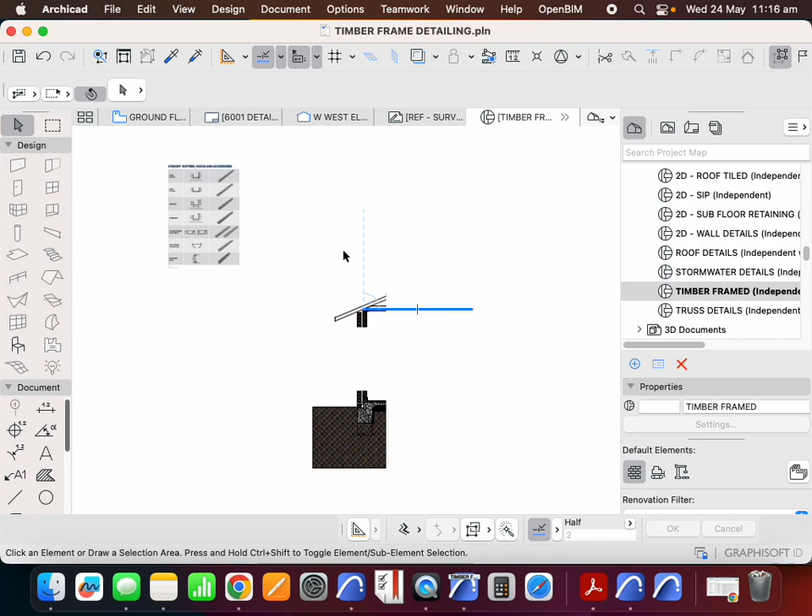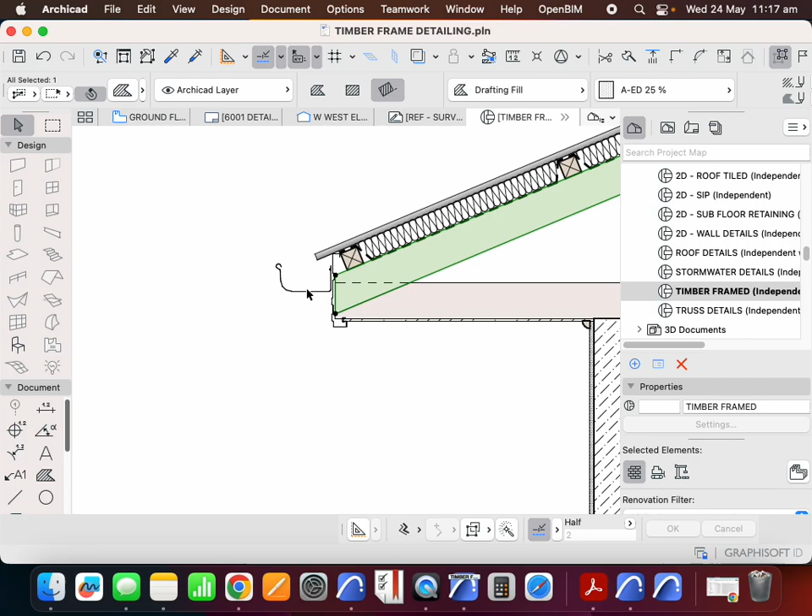We're now going to look at another framing detail, or in this case, a roof rainwater gutter detail. But we're going to have a look at a half round gutter with a different type of rafter and a different type of soffit. So this had a flat soffit, a 90mm rafter, a quad gutter, and a Novaline fascia. What if we wanted to have exposed rafter ends?

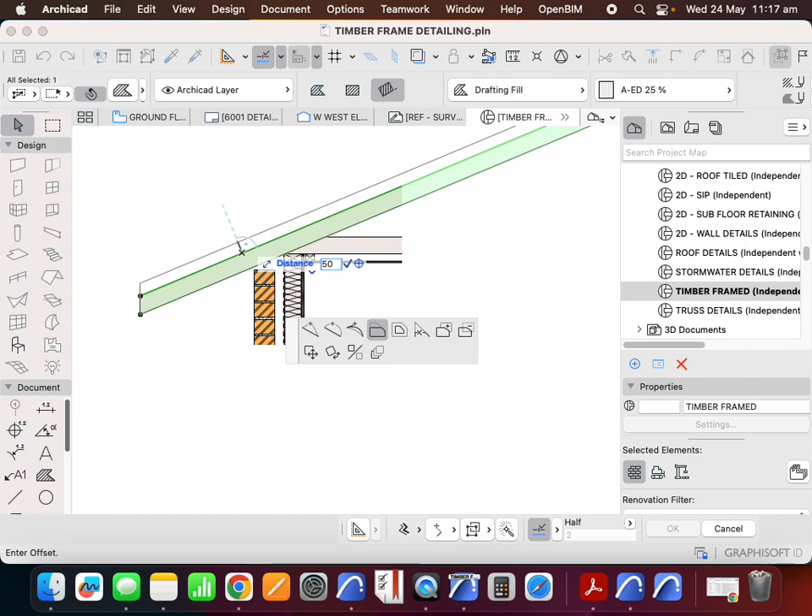Now, if we were to do this, it would normally follow a few other patterns. So normally, instead of being a 90mm rafter, it would probably be a larger piece of timber. Not always, but possibly. So let's just assume this is going to be a 140mm piece of timber. So we're going to increase this by 50mm. Now, if this is a larger rafter, which probably also means that it's a traditionally cut framed roof instead of a truss framed roof, it's probably also going to need to be notched.

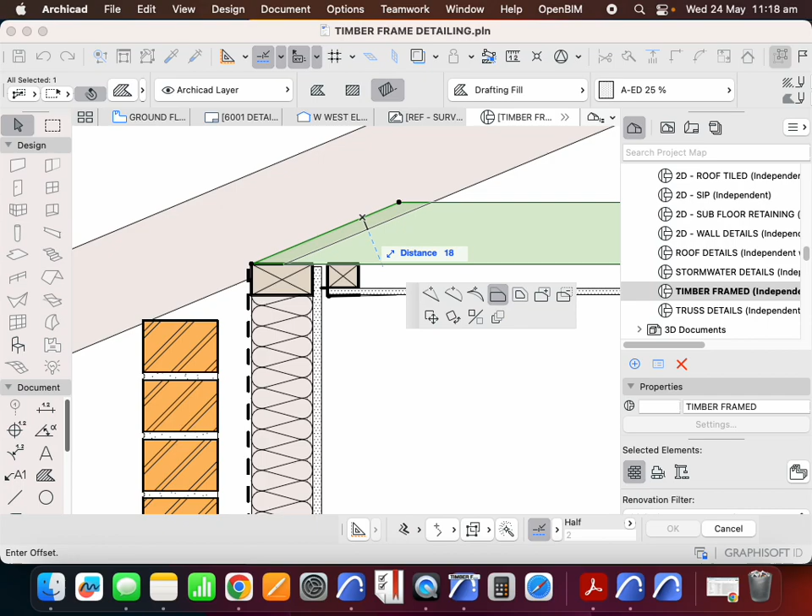So let's bring this down 18mm and we'll notch out this corner. So we'll just move those points and we'll bring this one back. And in this case, instead of the rafter and the ceiling joist being cut together, the ceiling joist in this case is going to go past and sit on the top plate like this. So we're seeing the rafter in the foreground and we're seeing the ceiling joist in the background.

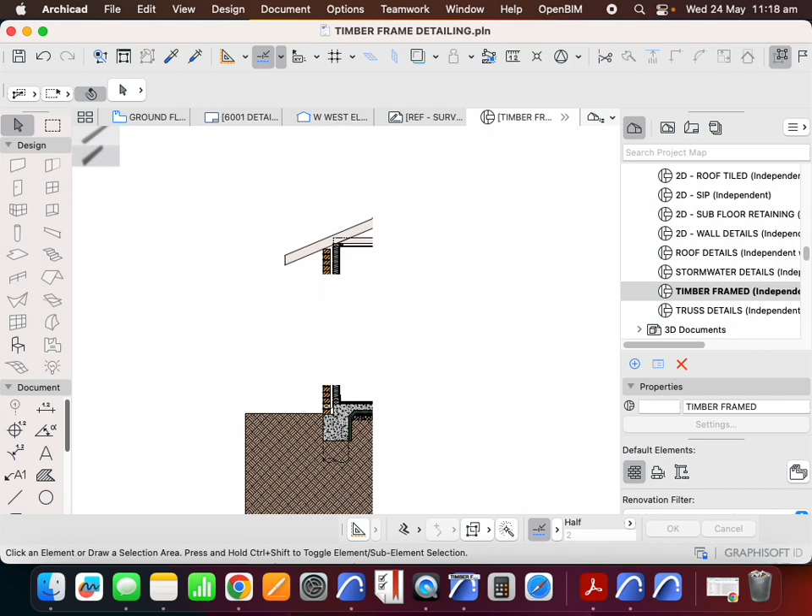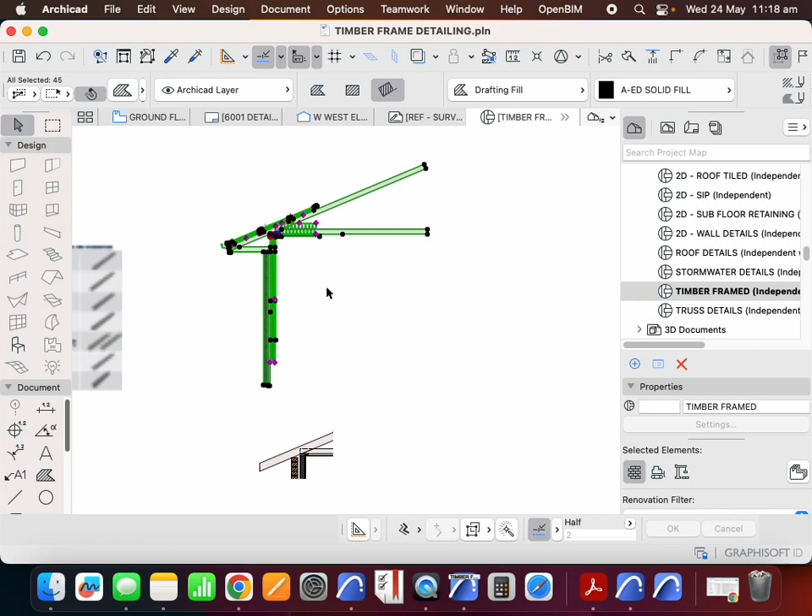We'll leave this for now as a brick veneer, but of course this could also apply if it was a cavity brick or a timber frame and clad detail also. And we'll copy the rest of this roof just to make this really simple. I got too much, I'm aware of that. I'm just going to move it up here. I'll delete everything that I don't want.

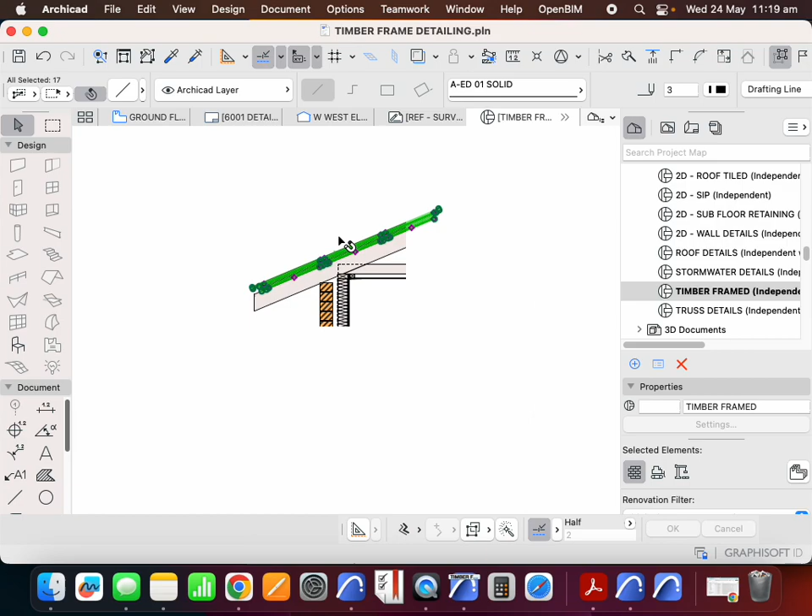What I'm wanting to keep here is the roof sheeting and the battens and the insulation. So I'll move this down into position and I'll move it based on the batten, and for now I'm just going to paste the batten there and we're going to move it a little bit more later. I'll just group all that together and we're going to slide that down as necessary.

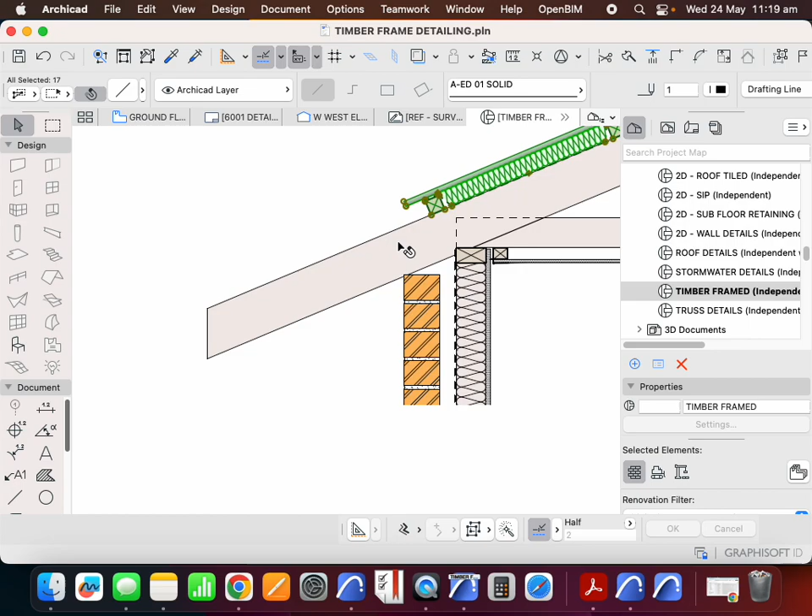Now, in order to have exposed rafters, that means that we're not going to have a lining on the underside of the rafter. That will also typically mean that I can't get away with just using battens because I don't want to see these battens and I don't want to see this insulation. So instead of having a batten here, typically I'm going to have some type of lining. So if I move this away considerably for now, we'll move this all the way up here. Let's put timber lining boards here instead. So I can use this same timber for now.

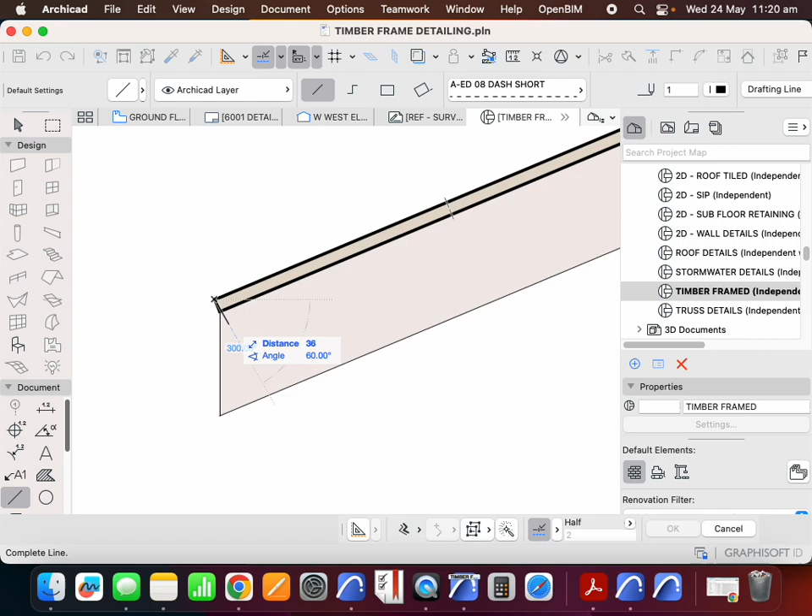And we might assume that the timber lining boards are 19mm. Now this could be tongue and groove, or this could be V-groove or something like that. It doesn't really matter. Now we will see that. So if we assume, for instance, that's a 200mm, I could draw a line here. Let's do it this way. Make it a bit thicker. And I'll multiply this with a spread of 200 or 190.

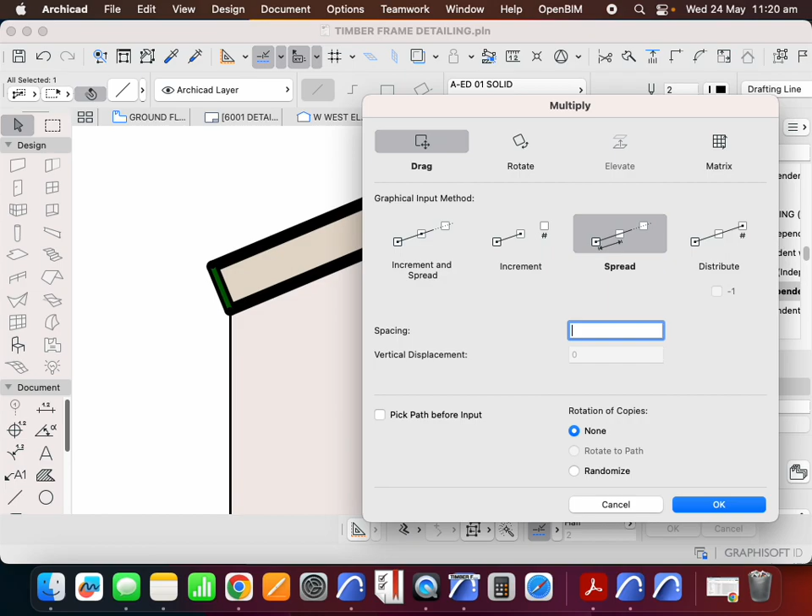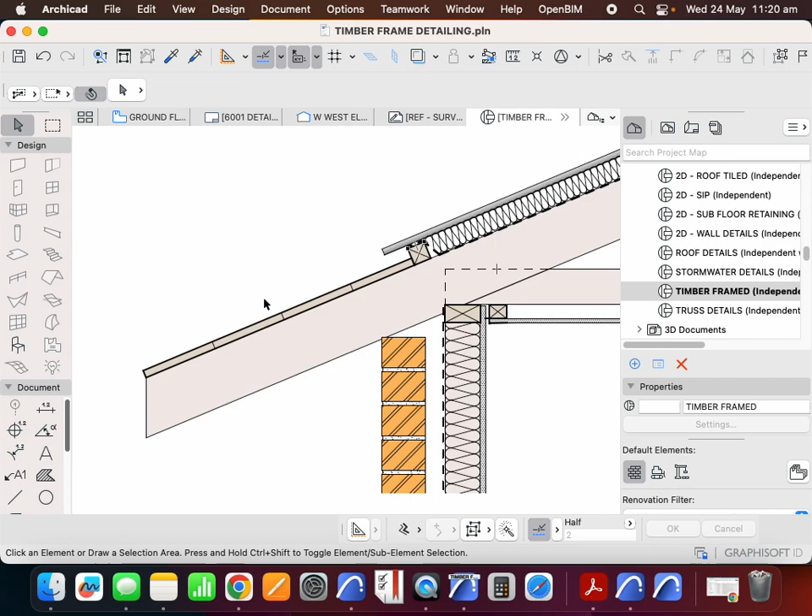So just dividing this into separate panels. Again, it could be V-groove, it could be tongue and groove. It's probably not just straight cut, but I don't need to see it at that level of detail. That's fine. Now I do want, ideally, something to continue along here. So I need something to continue. What is that something going to be? Am I going to have a batten that goes over the top of it? Obviously this is thinner than the batten zone, and we're going to need a smaller batten.

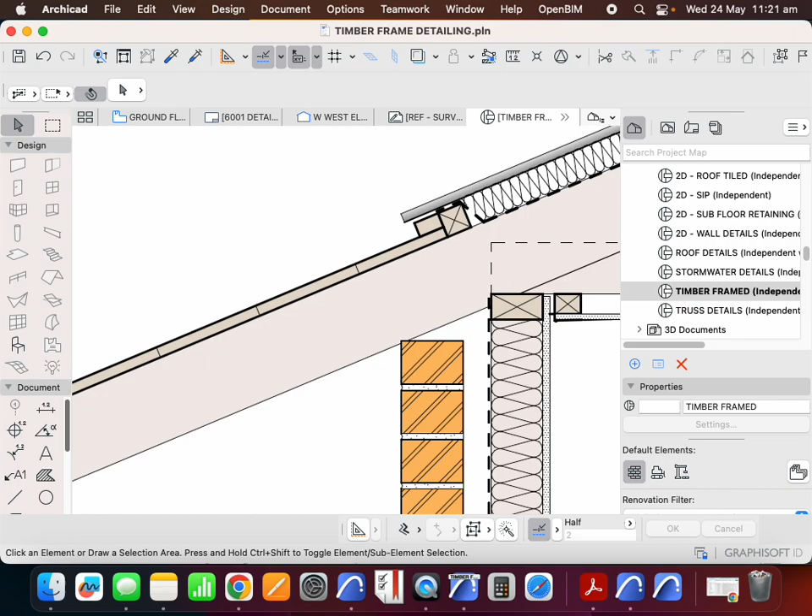So let's just create what that would look like. 25mm. In this case, I'll make it 45. It could, of course, be bigger as well. So I want this to sit here. And I can group these together, group, and maybe I'll just need a couple of these. Move, drag a copy, and we'll do at least, say, 300 center.

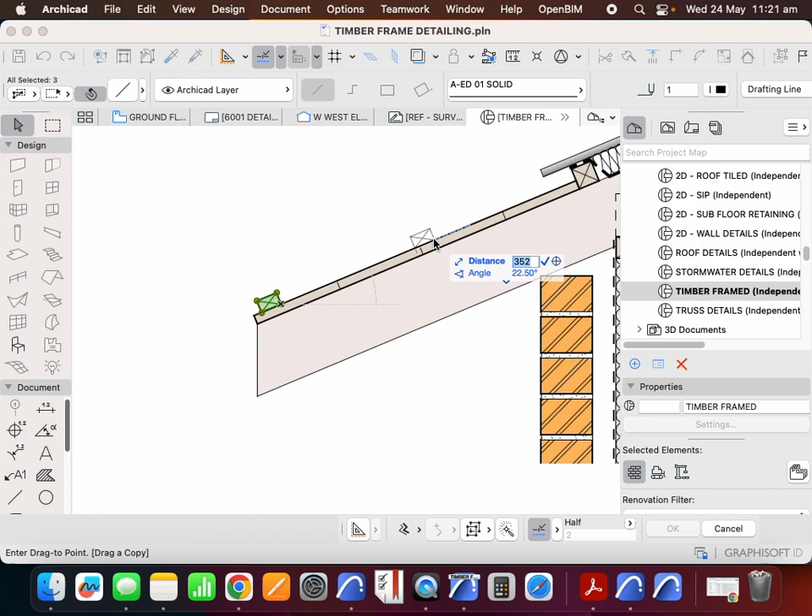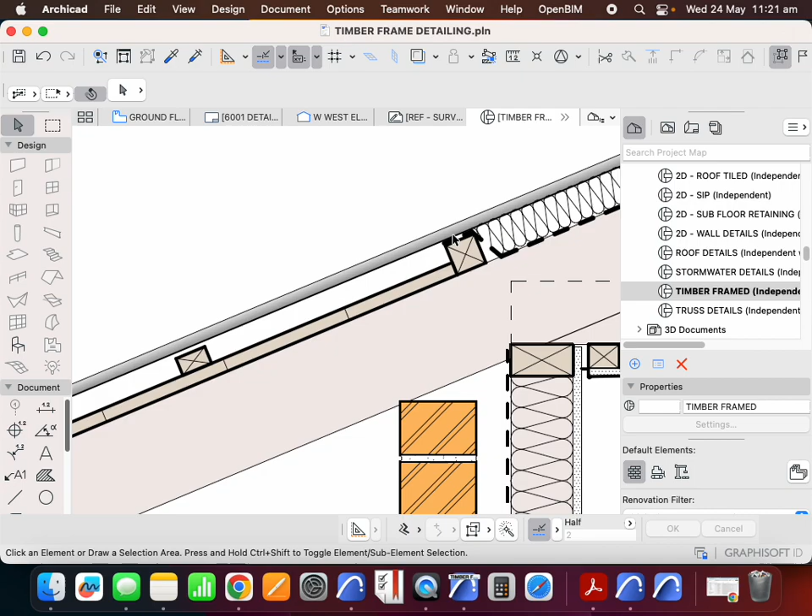Now the idea is that the roof sheet is going to continue, sorry, I'm pressing the wrong button. The roof sheet's going to continue across this, and the sarking blanket may continue through, or it may just be sarking, so we could actually have a difference going from a blanket to a sheet.

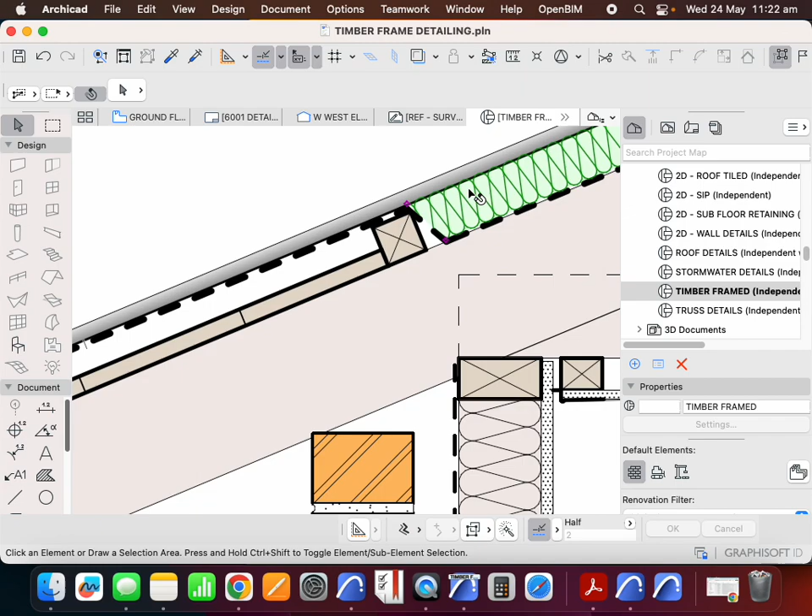Of course, the point here is that this is outside, so I don't technically need a blanket when it's outside, although I could still have a blanket if I want to. The blanket's going to help to reduce the sound, but I would also just need to make sure that the thickness of that blanket's not going to create a problem for how this would work. So for now, we'll just leave this represented like this to keep it nice and simple.

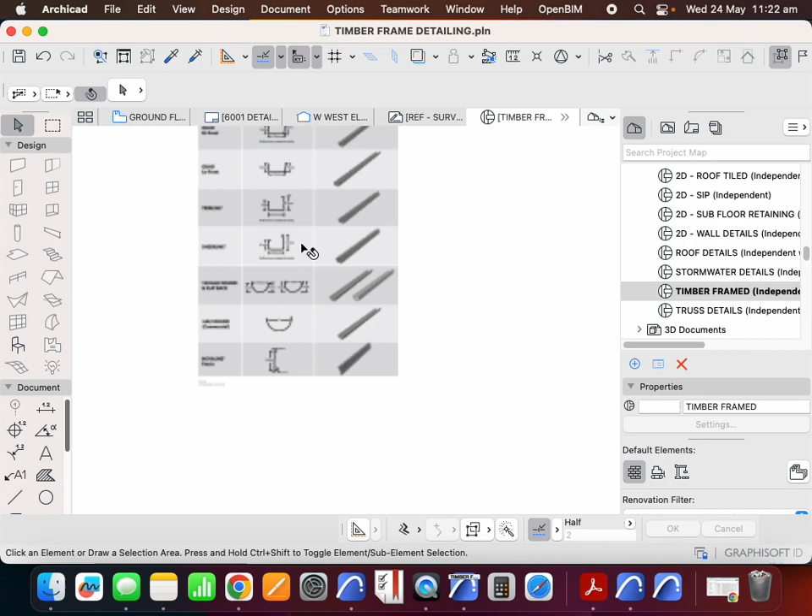The next thing I need to consider is what type of gutter am I going to use? And in this case, I want to use a half round gutter. So I'll take this, another version of this PDF, I'll explode it, and I just want to keep this one here. So instead of deleting everything else, I'll just move this one away this time. And then delete that all in one go.

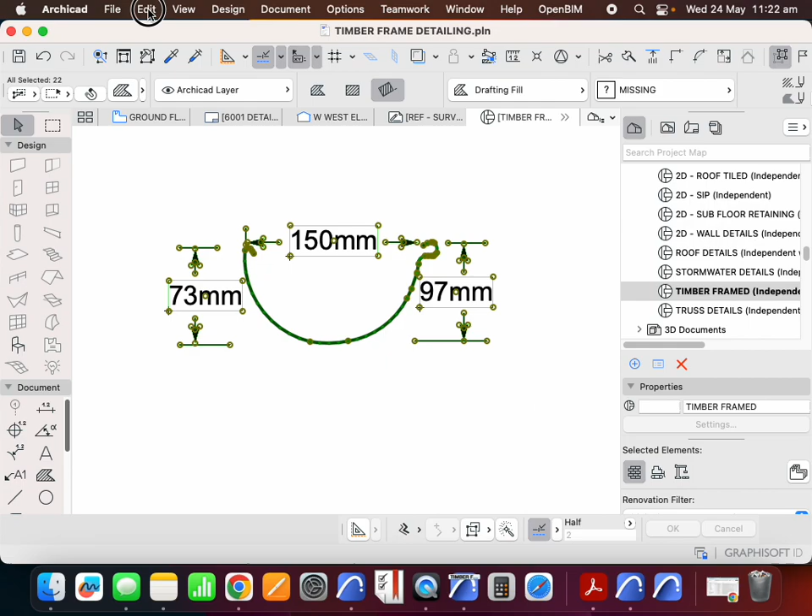I'll do what I did last time and check the scale. In this case, I'll use the 97mm, edit, reshape, resize, define graphically, 97. I'll delete all the rest of these.

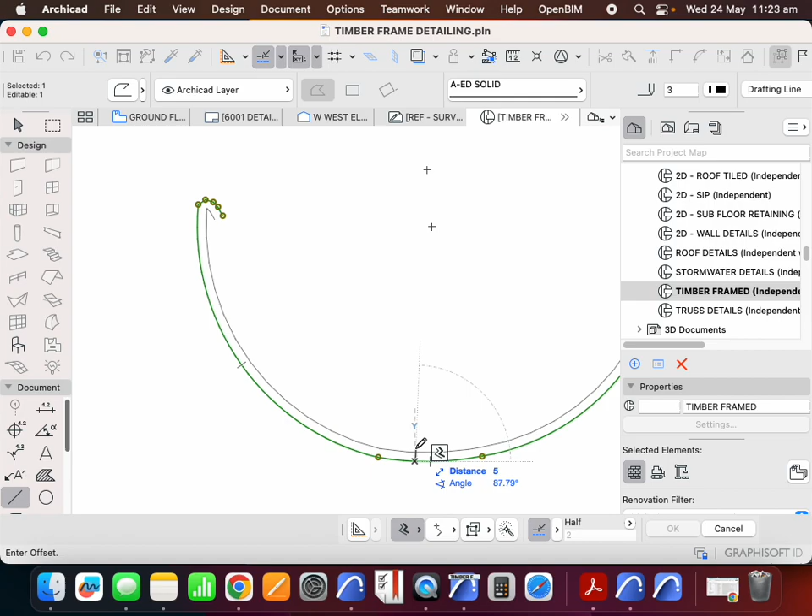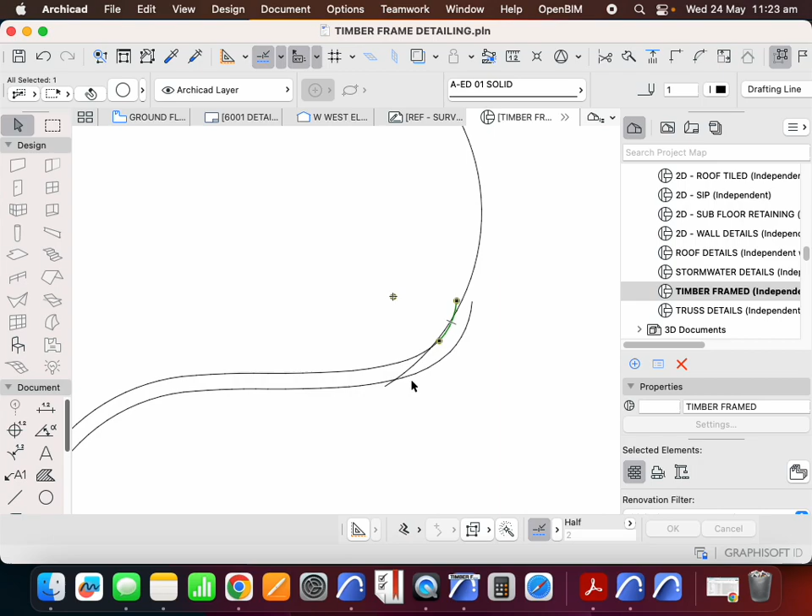Select, offset inside, and I want that to be less than 1 millimeter. Close it. You see that didn't offset very well. That's because it wasn't probably drawn very well from what we can see. So if I was to try to fix this,

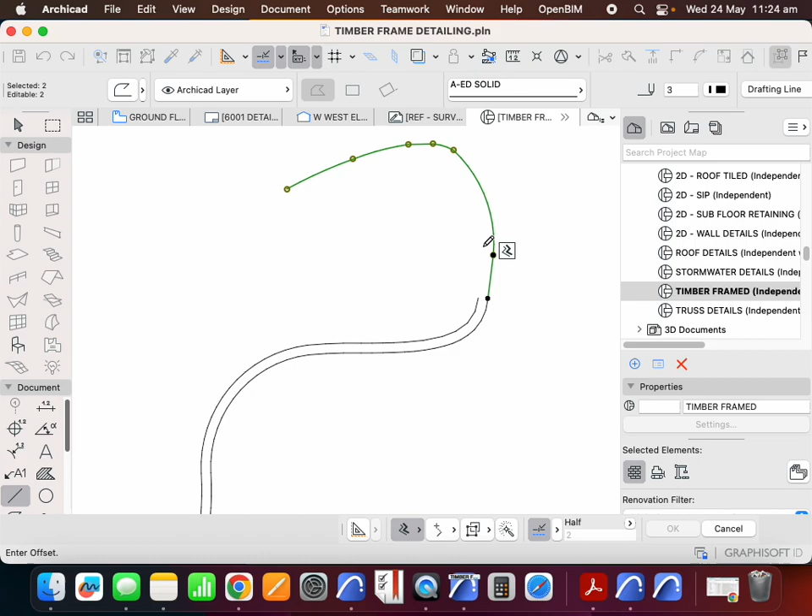let's just offset this part. It's going to be really tricky because I now need to line that up. Something else is also going a little bit wrong here, but that's okay. I have to make these join, otherwise that's not going to close. And I need to close this end. Now hopefully that's going to work.

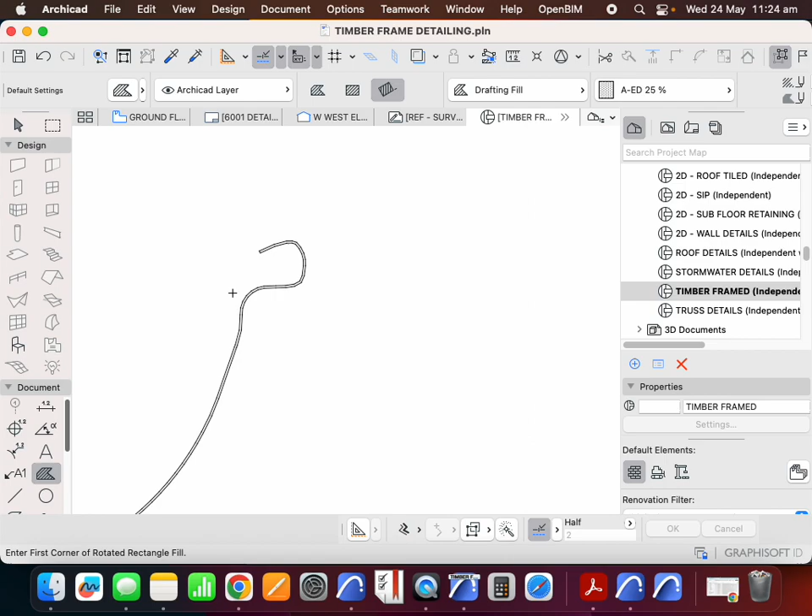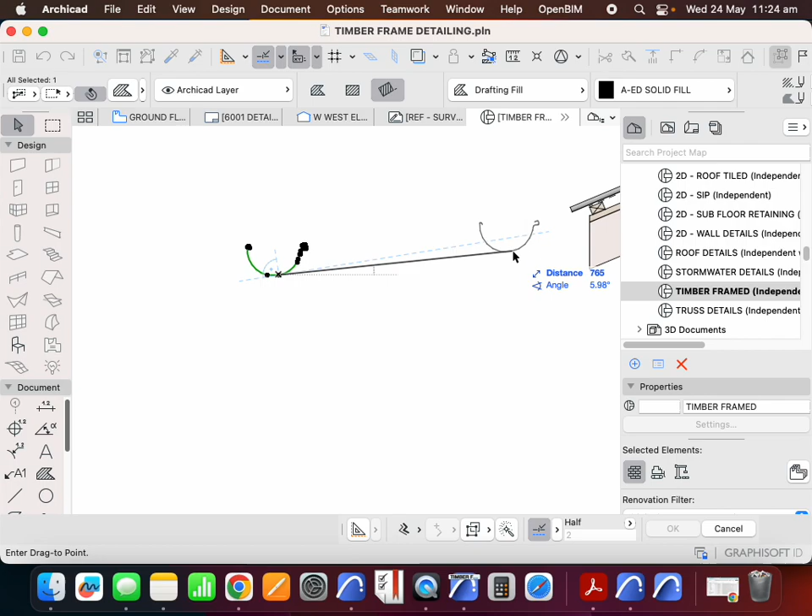There were a few errors in this case, so it might not work like I wanted to in the first go. We'll pick up the setting of this fill again. There we go, it worked all right. Turn the magnet back on to make it really easy to grab that fill. Move the half round gutter, delete the lines. This is backwards again, so we'll mirror it, move mirror. So I want the roll on the outside.

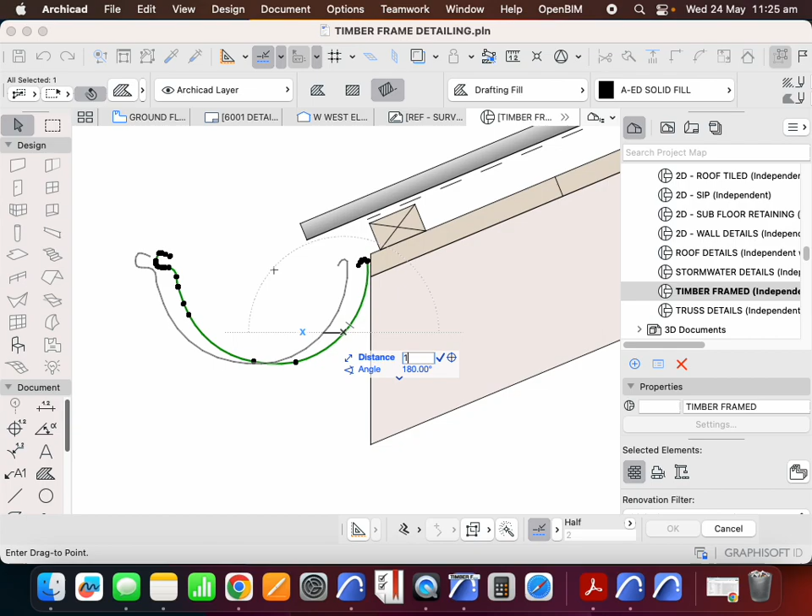Now where does this sit? That's the question, of course. So this again needs to sit below the roof line. In this case, I want to expose the ends, but it needs to come out a little bit because we can see that because it's half round, it's a little bit trickier to fix. It's not easy to fix it to a fascia. In this case, it's not even easy to fix it directly to a rafter.

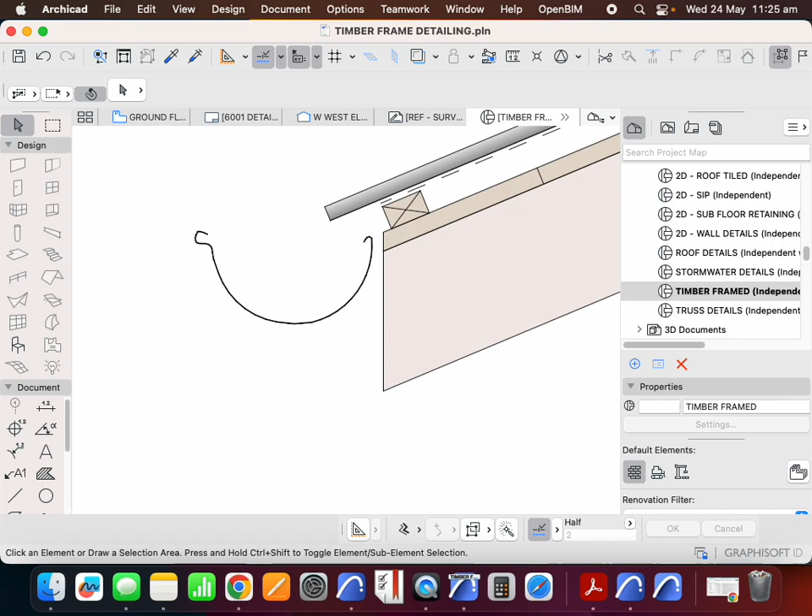And so I need to have a half round gutter bracket that this fixes to. Now I could use a strap fixing, but I prefer the look of the half round gutter bracket. Now I can represent that. I can try to draw it. So I could use the same method as before, offset. Now I'm sort of limited with what I can offset here. I'm going to offset as much as I can, and then I'll delete all the bits that I don't want.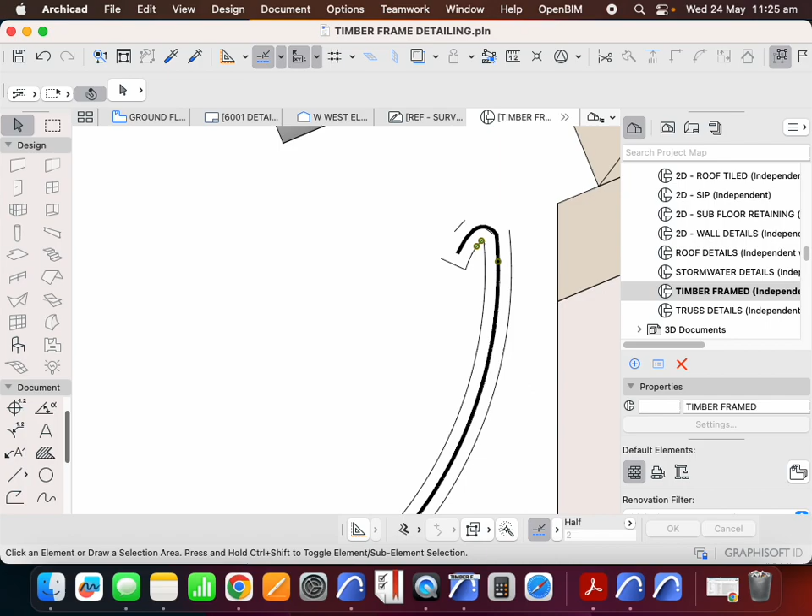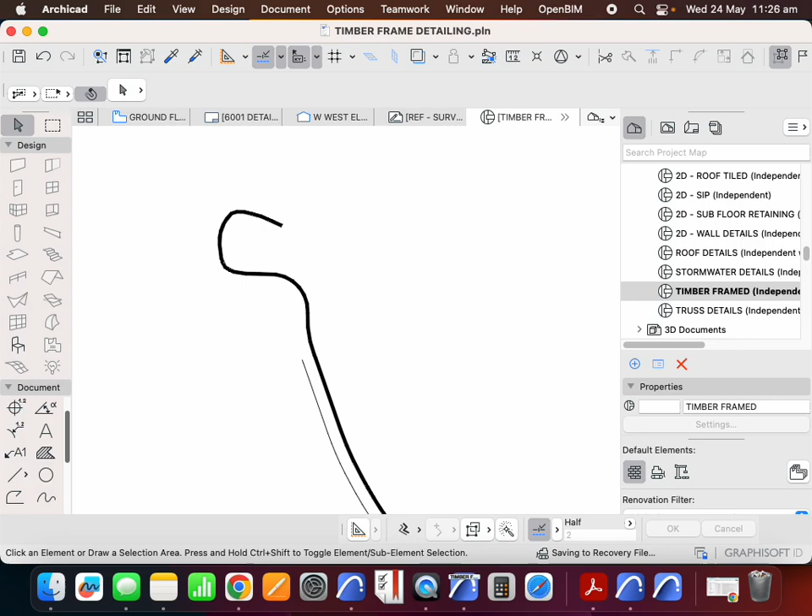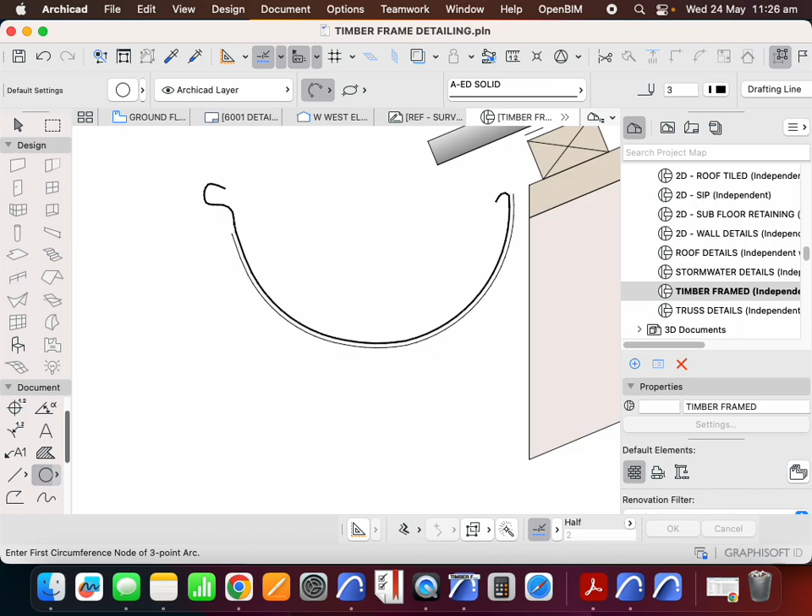Let's see if I can make that faster. Great. So then I'm left with these few arcs. So they all need to be grouped together, and then I can offset that again if I need to. Or I can just draw a new arc myself, or I can use a spline. So I'll just try to draw a real arc in this case. So I'm going to suggest that the bracket gets very thin on the edge.

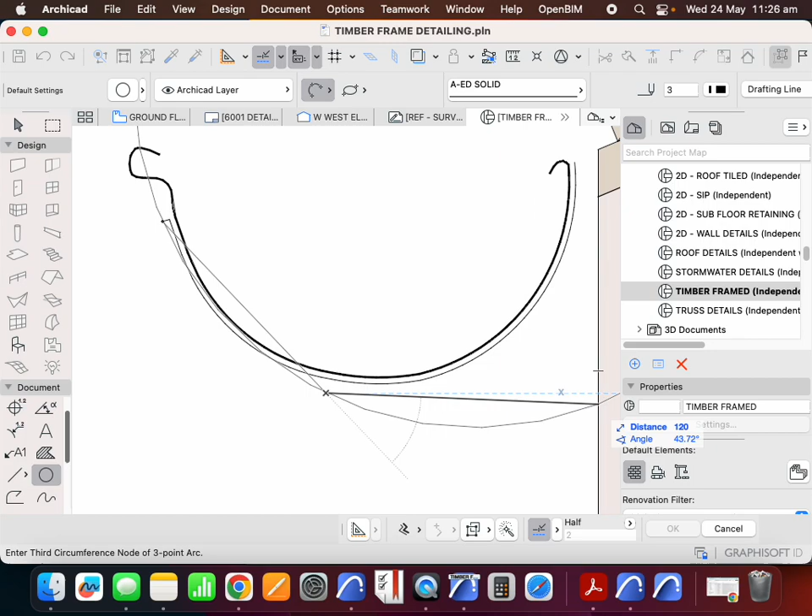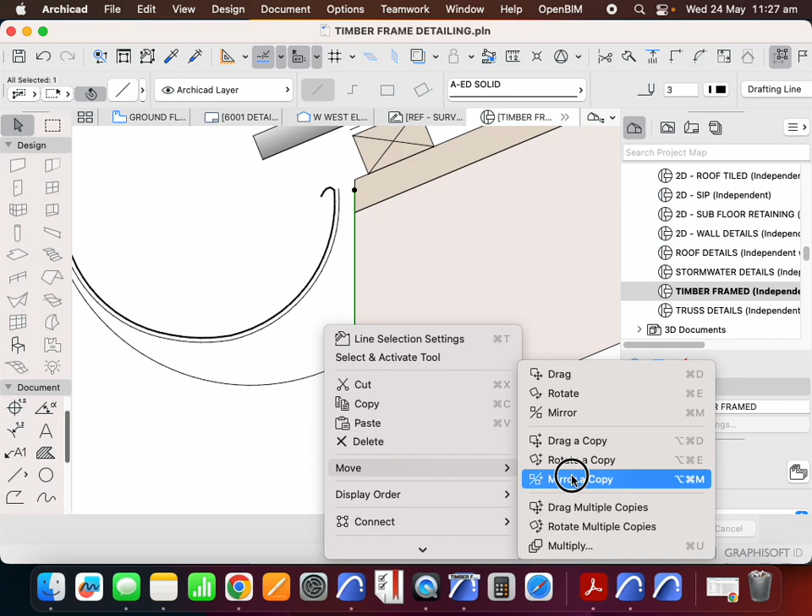Now this isn't a custom item, this is an off-the-shelf item, but unfortunately I just couldn't find any nice details for it, so I'm just going to draw it quickly. So I'm going to do this as a 3-point curve. I haven't got it right in the first go, but we'll see that it will work in the end. So I'm going to need to stretch that curve out a little bit. And then I just want it to have a bit more depth at the back. Now I think it's only 5 mil, not 10.

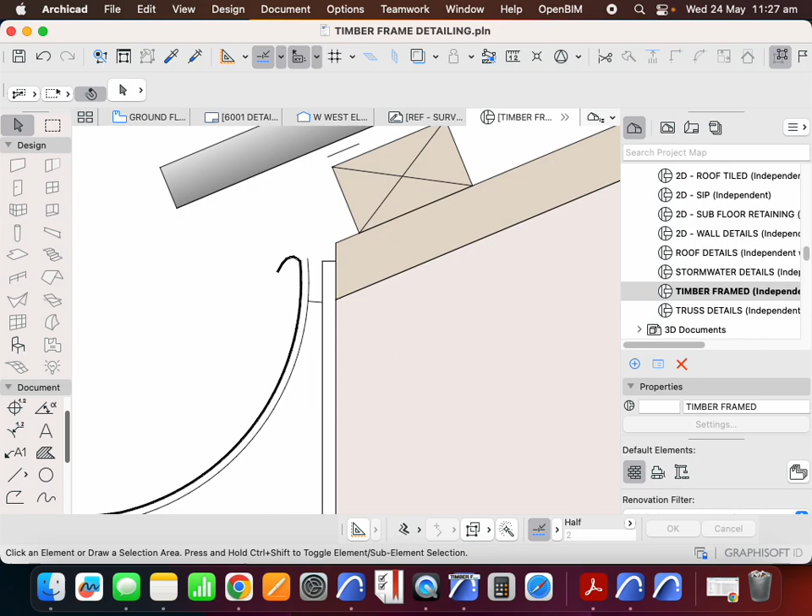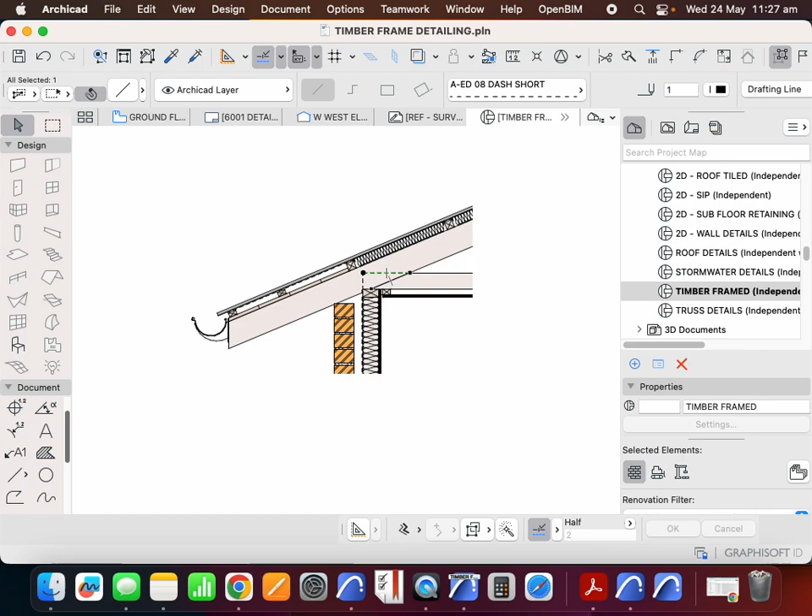All right, so that's just a representation of my half round gutter bracket sitting on the outside. So now I've got my roof sheeting, I've got my half round gutter bracket. We've extended the rafter depth. We've changed the ceiling joist so that it's running past the rafter. Now, how does this finish?

Now, this could be brick veneer or it could be weatherboard cladding, like I said. Now, typically, I wouldn't be doing this type of detail for a brick veneer anyway. It's more likely to be a weatherboard clad detail. So I'm going to delete the brick from here, and we're going to use this as an opportunity to have a look at replacing this with a James Hardie weatherboard cladding or a WeatherTex. Now, if I wanted it to be real timber, I'd use WeatherTex. If I wanted it to be fiber cement, I might use something like James Hardie.

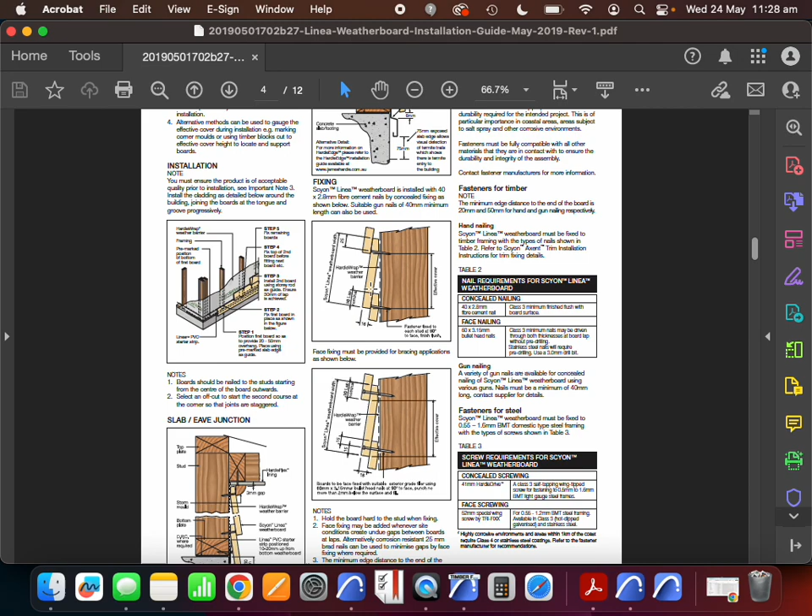James Hardie has a Linea. Let's do it this way. So I might open it up first. So this is the look that I'm going for in this particular circumstance. And we can see some detailing here to explain how it's actually fixing. This is what I want to copy effectively. So I'm going to find one that looks pretty good in terms of a detail. So this is page 4. This is the one that we're going to import.

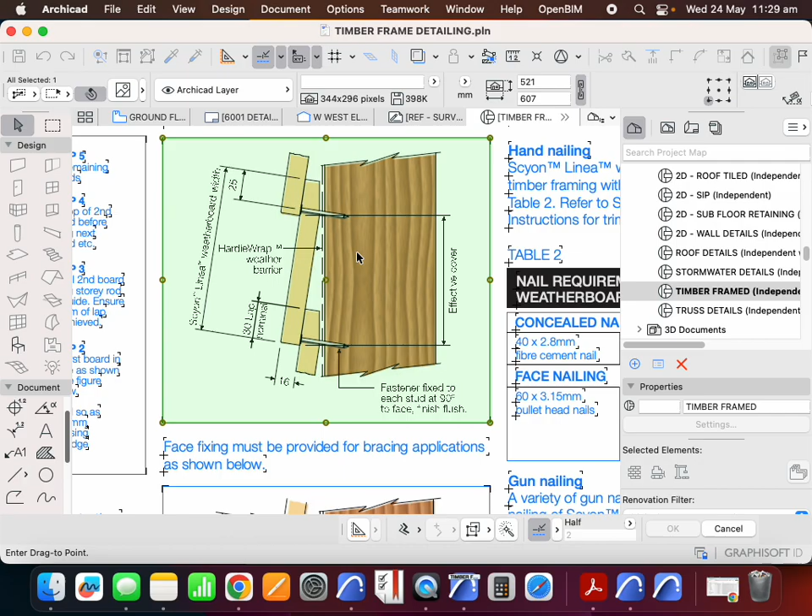Now these details aren't quite the same as the Lysaght one. So when I try to explode this, we see it's only going to give me an image. So there's an image there, and then there's bits as well. So in this case, all that I'm wanting to keep is this element, and I just need to make sure it's the right size.

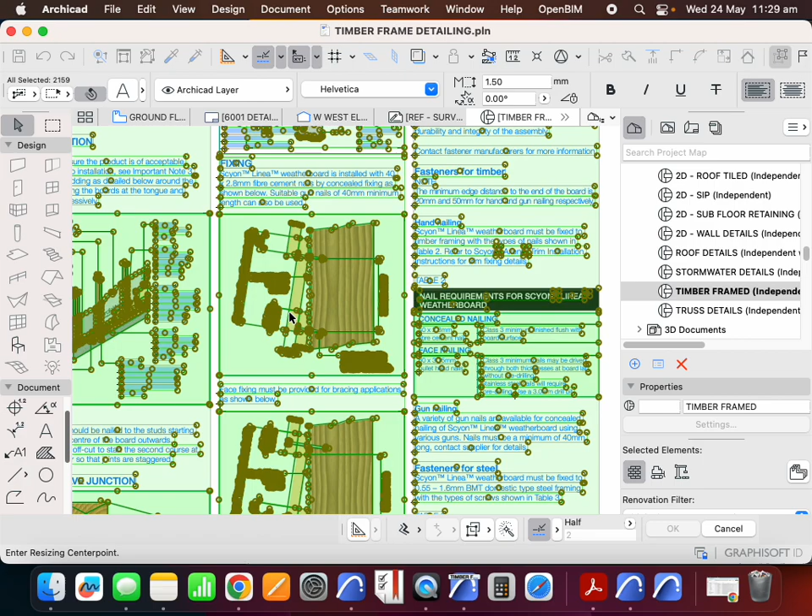So as before, I'll do it all in this case. It's a bit of a mess, but that's fine. Resize, define graphically, and make sure it's got that 30 mil lap from here to here. I want that to be 30.

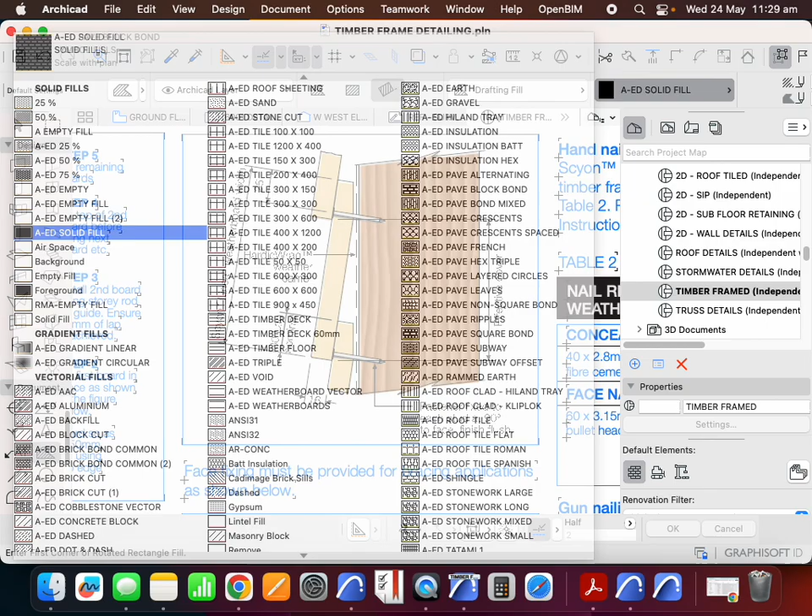Now, I don't want to have all this mess. Like before, I'm not going to keep that. I'm just going to use this to trace over a fill. What is it? So it's fiber cement, so it will look like this, just like the fiber cement soffit lining that I had. But I'll just trace over this one. Now I can do this in one go with a magic wand. And I might just copy over this one as well, just to help explain how that works.

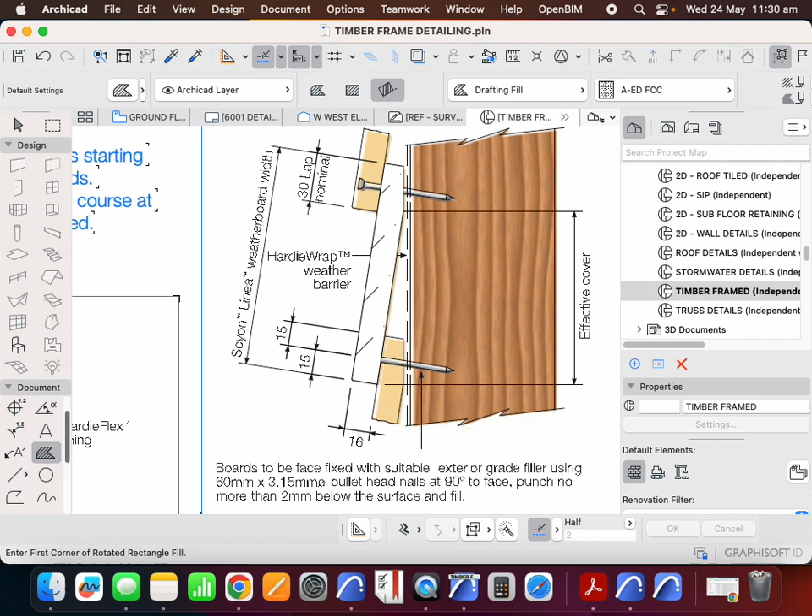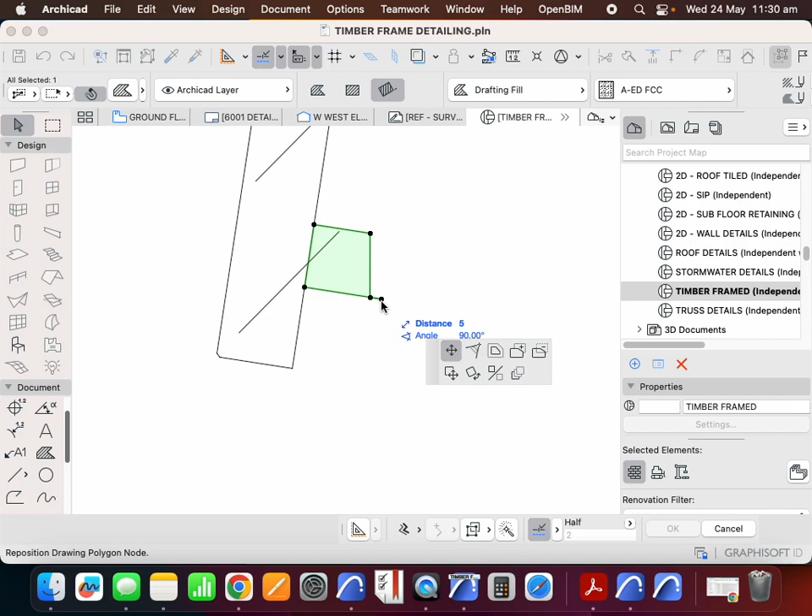So again, it's a 30 mil lap. I'll just copy that and copy this just to remind myself of where it needs to sit. I'll move this into place. Now, where do we start? When we're doing weatherboard, of course, the way that the overlap works is that we need to start at the bottom. So the reality is that this is actually starting all the way down here. At the moment, I don't really care about drawing or representing the whole wall. So we're just going to start from around about here.

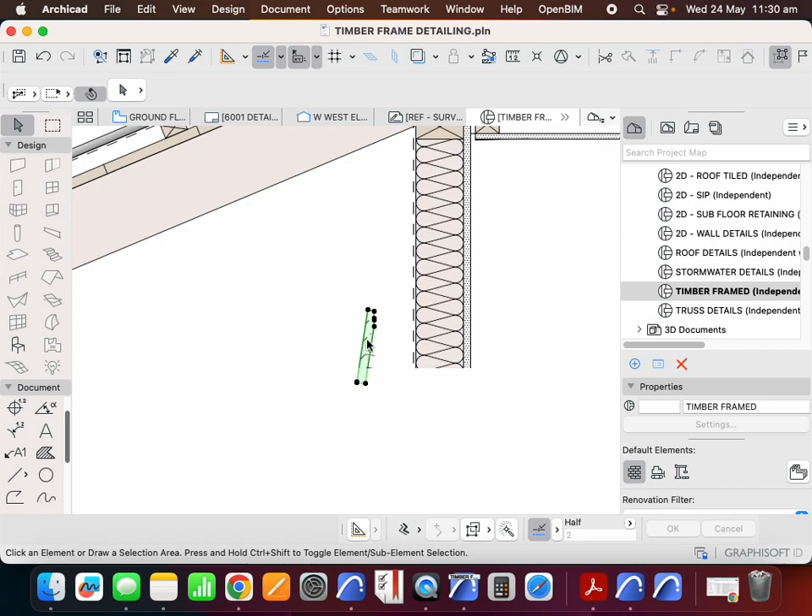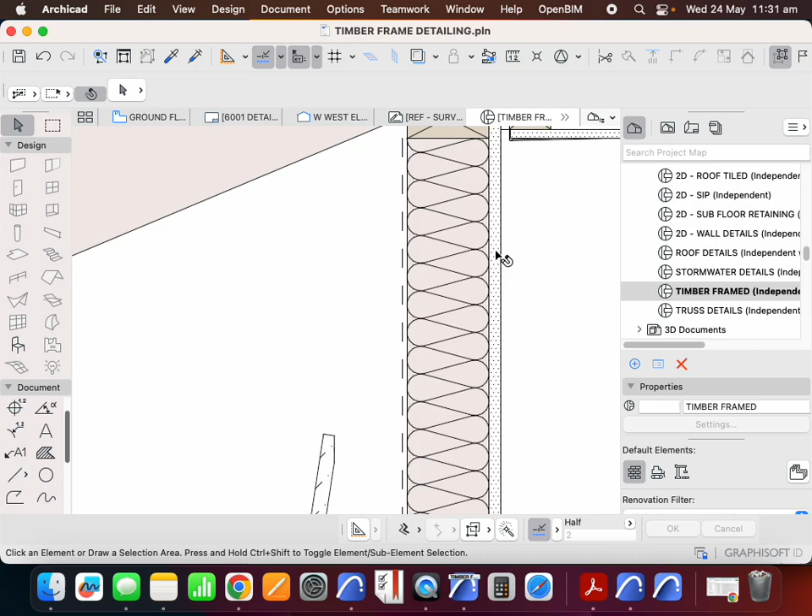Before I do this, however, when I'm using weatherboard, I'll tend not to have weatherboard stuck directly to the outside of the stud. I want to create better insulation, both thermally, and I want to create better sealing. The sealing on these weatherboards isn't very good. So what I'll typically do is use a piece of plywood or a board of plywood or orientated strand board on the outside of my stud.

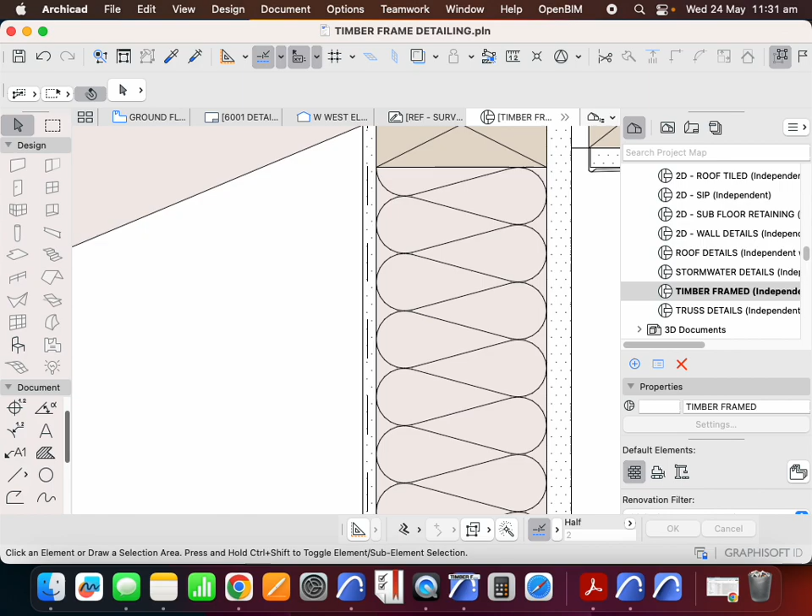So let's just do this by copying the plasterboard for now. And instead of being 13 mil, let's get rid of 6 of that. So it's going to be 7 mil plywood or 6 mil orientated strand board typically. And then I'm going to have my sarking or my vapor membrane on the outside of that plywood. Again, I need to toggle between my true line weight and my thin line weight so that I can see it.

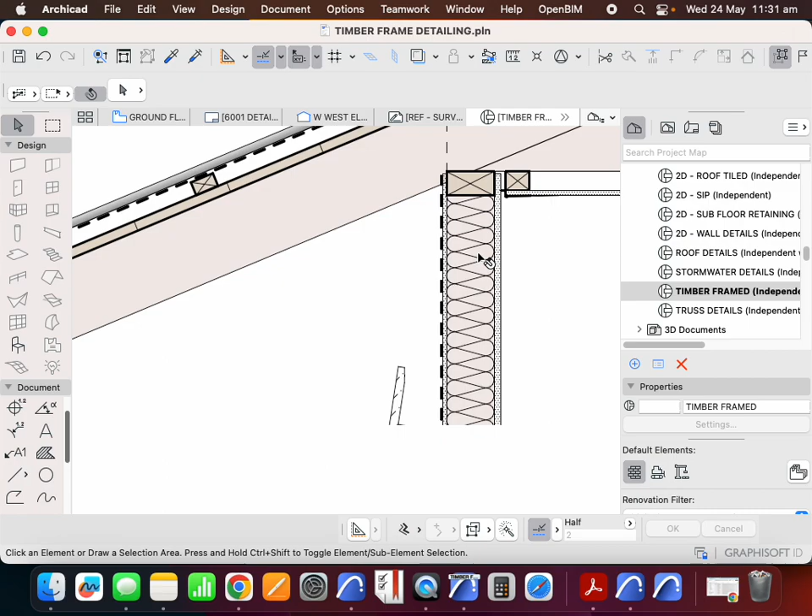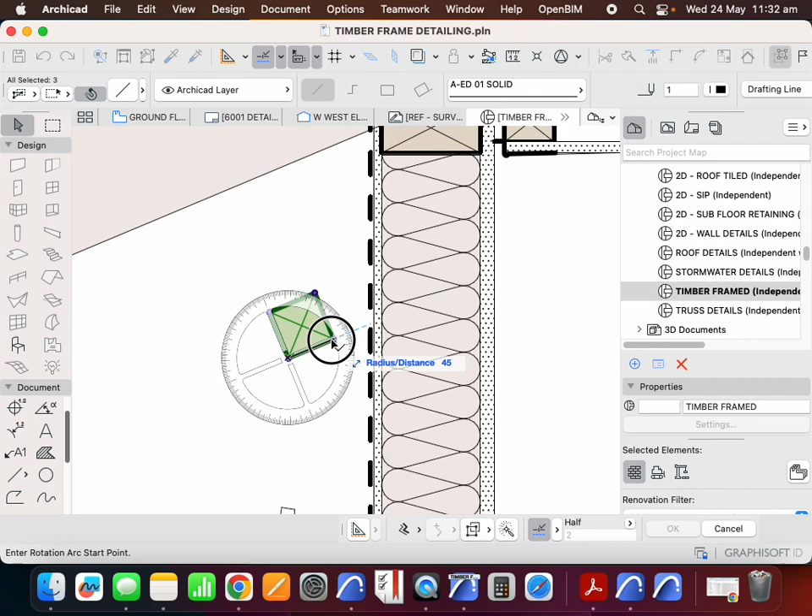And then on the outside of that, I'm probably going to put battens because again, I want to have a space, a cavity between my membrane and my weatherboard. So what will that look like? That's going to look like this. Rotate. Instead of being 45, that'll be 35. Sorry, stretch, edit, reshape, stretch.

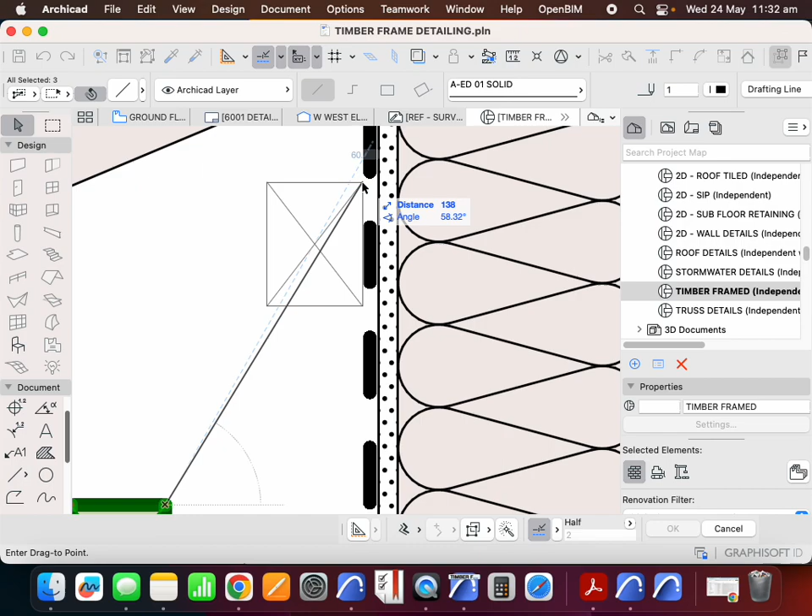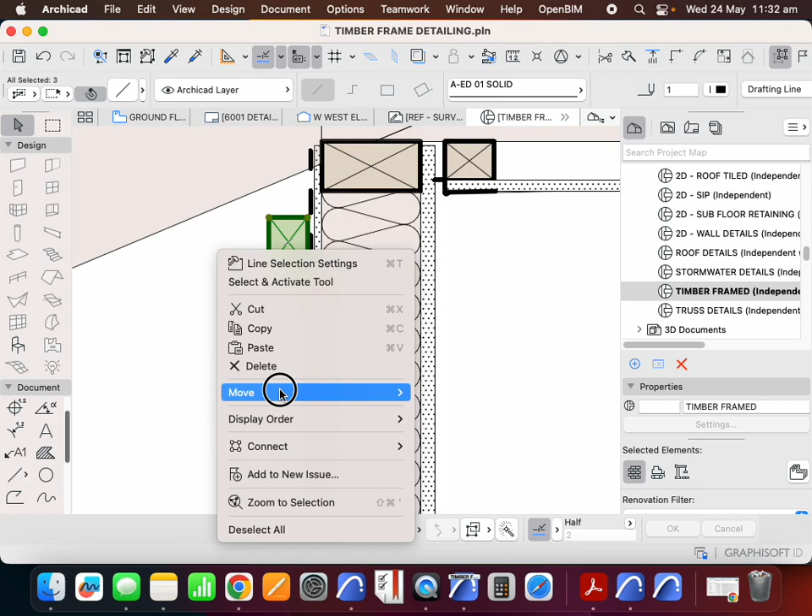Now, basically, that's going to sit here. But I don't want a horizontal batten, I actually need a vertical batten. So that'll be like that batten, but let's use the rotated rectangular method. Going down here. Now move this batten to the side for now. Now where does this go? This batten can extend up as far as I want. In this case, I'm going to have this extending all the way up because I want to clad over my rafter, or between my rafter might be a more correct way of saying that.

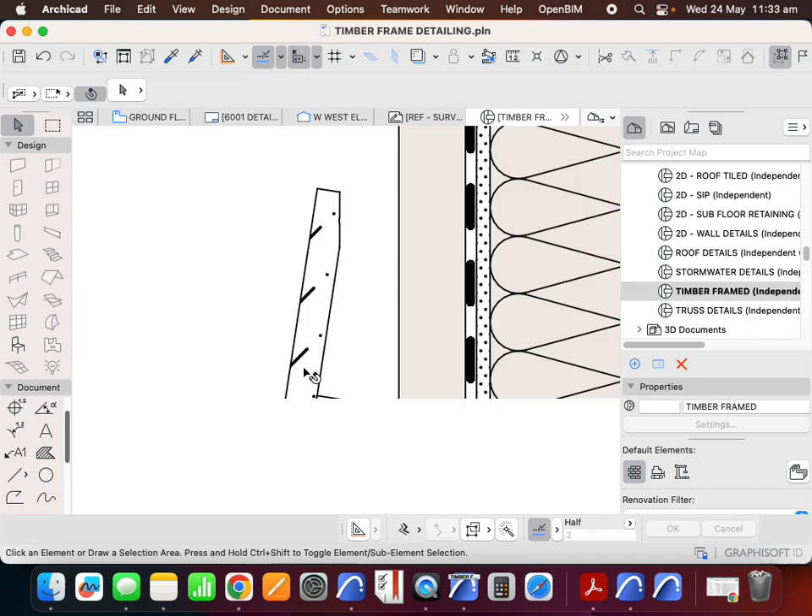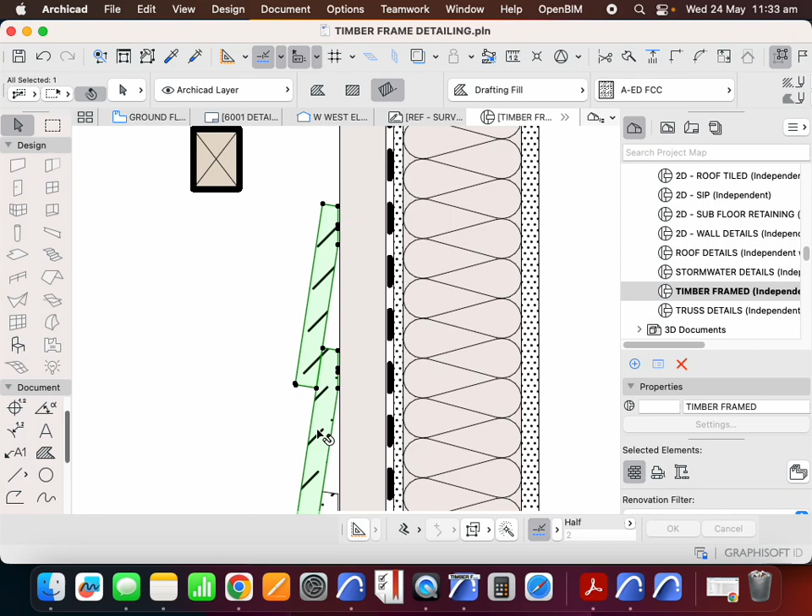So in order to make this work properly, I'm just going to make a white background just so that looks a little bit more consistent. And the idea here is that my weatherboard will sit like this. And then repeat. And repeat. Let's change the settings of that. I want an outline of 2 or 3 and a fill of 1.

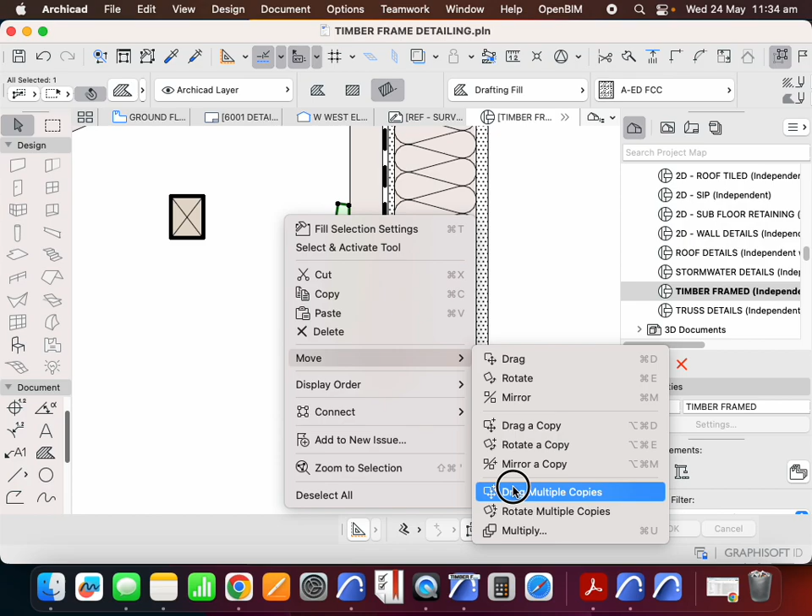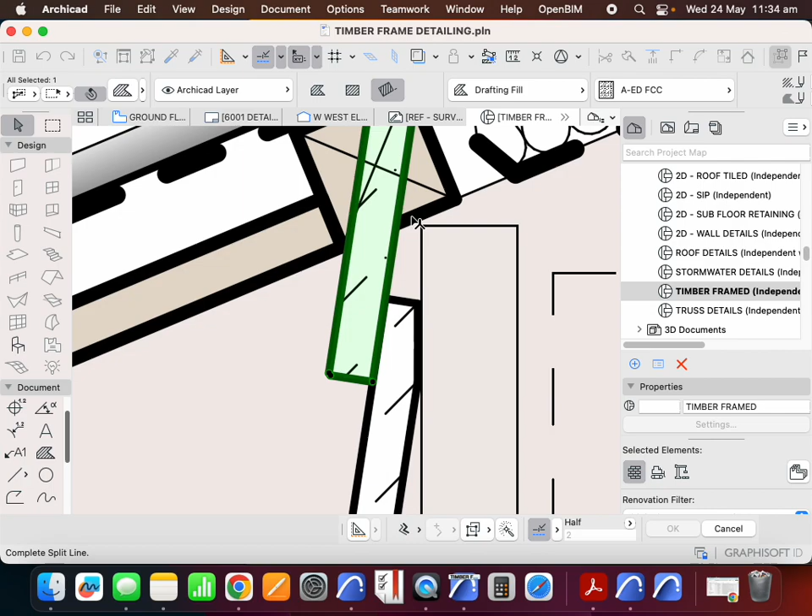Let's do that again. Drag multiple copies, repeat, repeat, repeat, and of course that would go all the way to the top. We can see that's an awkward little way to finish. So I'll need to finish that here. And then I'll probably end up having a little bit of a batten, something behind there, in order to be able to support that. Just a packer, effectively.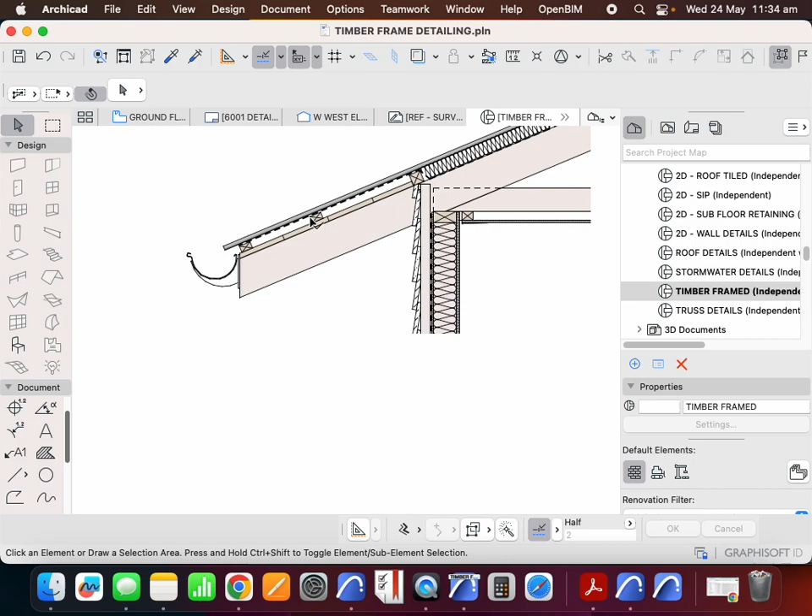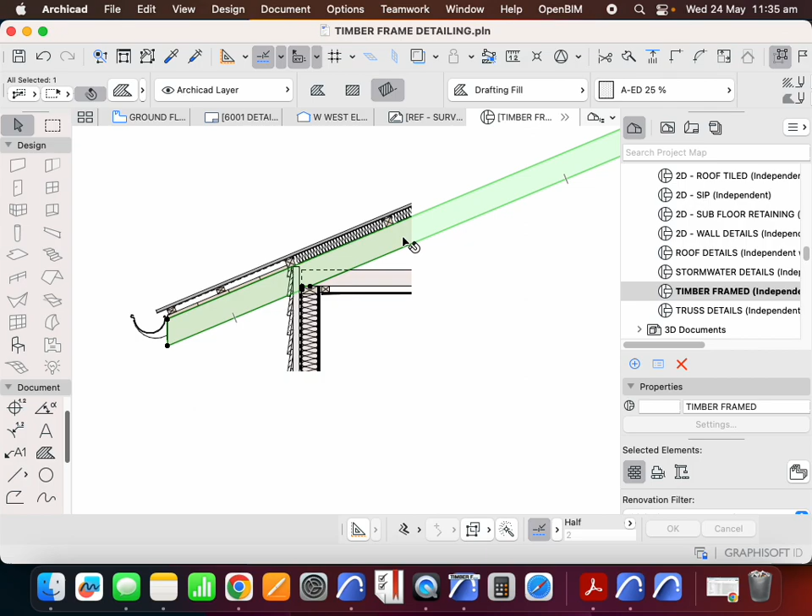And so now I've got my weatherboard. The weatherboard is extending up past the rafter, or between the rafters in reality, and so it looks like the rafters running through. Now this could be one of two things. This could actually be the continuation of this rafter running all the way out, or this could be a rafter end. So for instance, if I was just using a non-dressed piece of timber, because in this case I'm not having exposed rafters internally, I've still got a flat ceiling, so this might be undressed treated pine, and I might make this dressed treated pine, or dressed hardwood or something else like that.

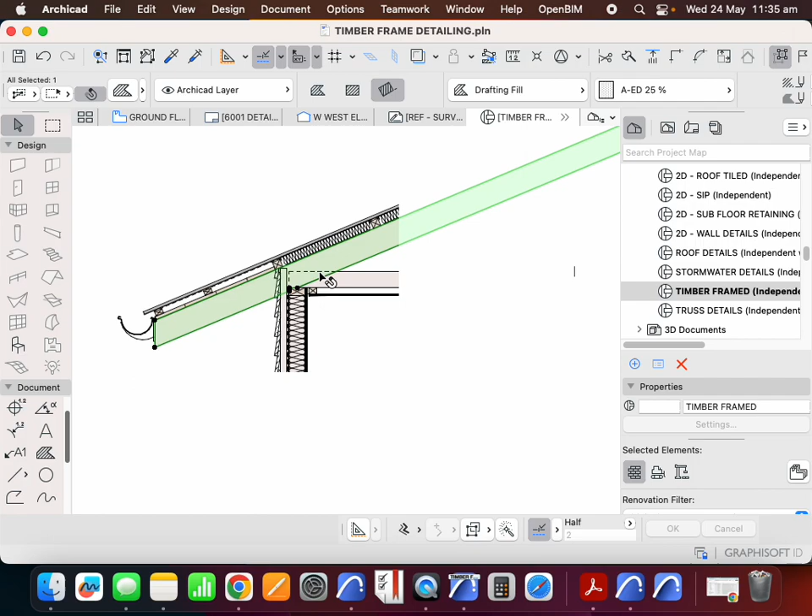So I could change the size of this timber potentially, I could change the type of this timber potentially, which would mean that I'd be cutting the timber here and joining a rafter end to a rafter. In this case, I don't need to show that level of detail because that's not necessarily what I'm doing.

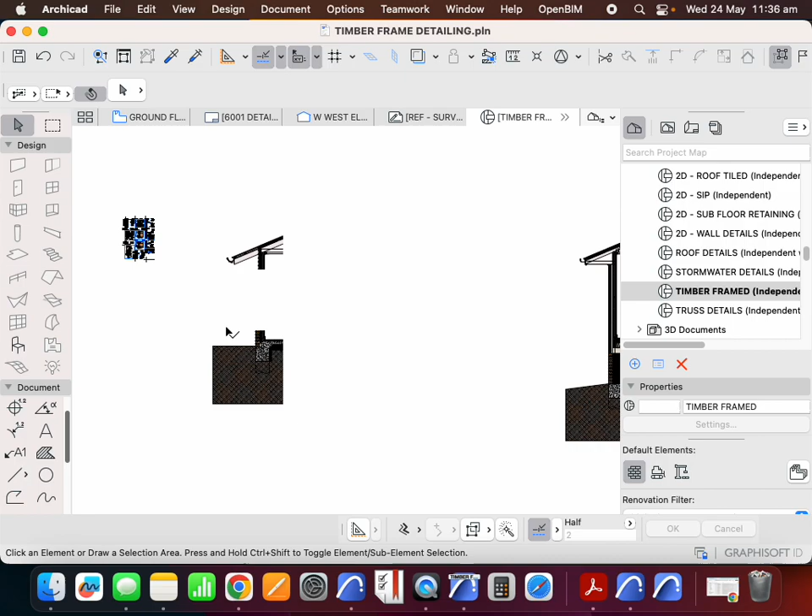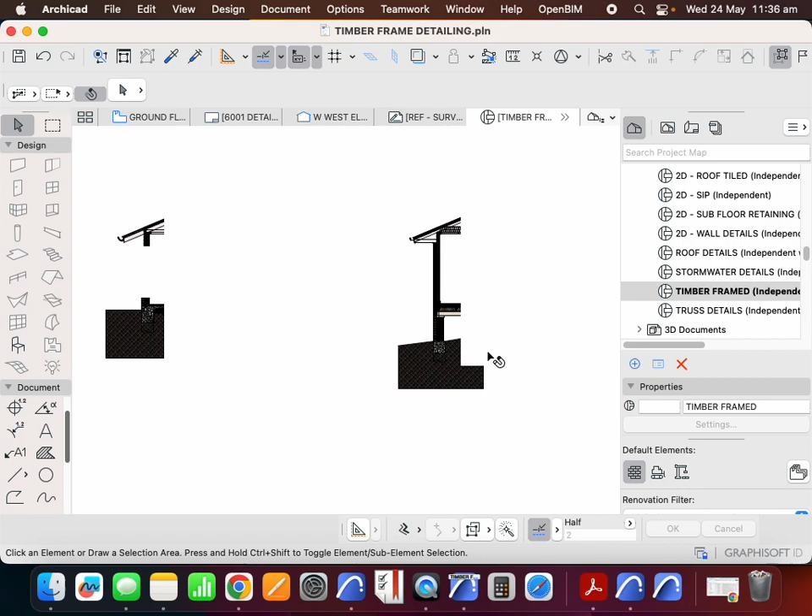But now we've got another type of detail, and we've basically finished out this series, and so we've looked at a few different options for at least a single-story house where we had a brick veneer wall. We have a Hebel clad wall. We have a weatherboard clad wall. We have a concrete slab on ground, and we have a suspended timber frame floor. The only one we're going to have a look at next is changing from 1-story to 2-story and adding in a suspended first floor timber frame floor.